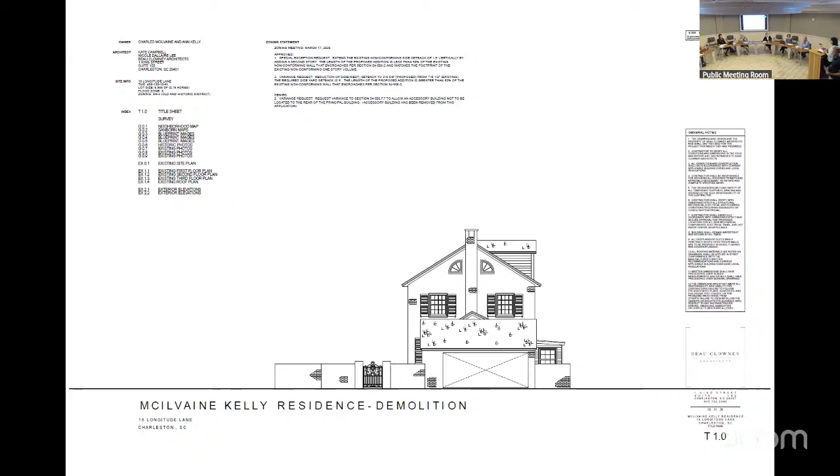So we are proposing the demolition of a garage, an unoriginal link to a 1950s neocolonial house. The garage and the link were kind of coupled together over time, and there's been a bunch of smaller renovations as well.

Across the street are largely the rear gardens and garages and accessory structures for houses on Tradd Street.

Can we zoom in? No, we're not. Okay, so again, those properties are facing away from Longitude Lane. Their architectural sides face Longitude Lane, and their architectural fronts face the side of the property.

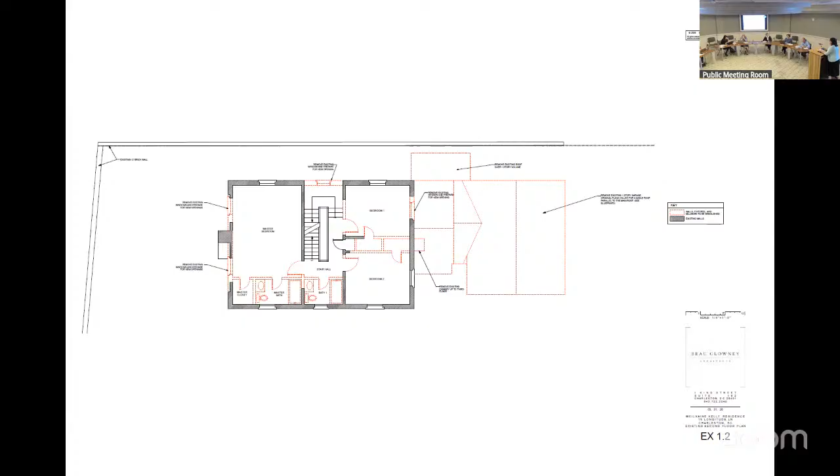This is the second floor, again, largely removing the garage and attached pieces. And then we are proposing a small removal of this upper window with the circular top that we believe has already been touched.

On the top, we are proposing removal of knee wall to make space for potential dormers in the front, and then potential dormers in the rear of the roof, again trying to add space to the attic potentially while staying within the footprint.

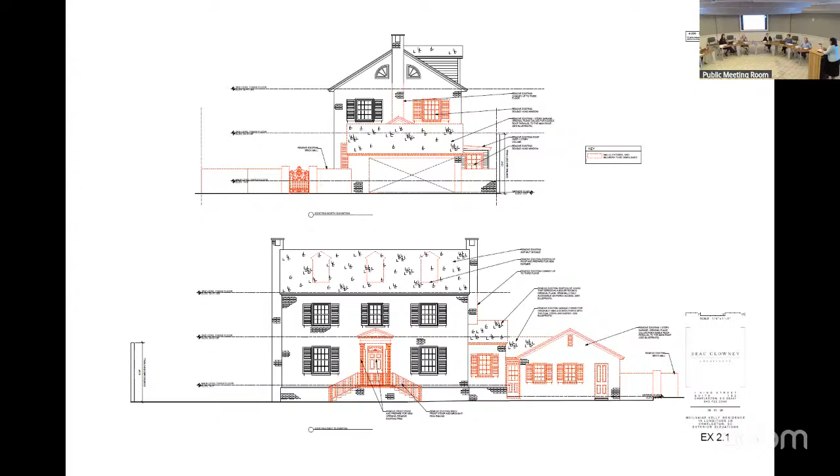And we are also proposing to replace the front door and front stoop, and so we're asking for those to be removed.

And that's it. Any questions for the applicant?

I have one. So do you want to demo the fence and the gate too? Did I see that? I didn't see it in the plan, but I saw it in elevation.

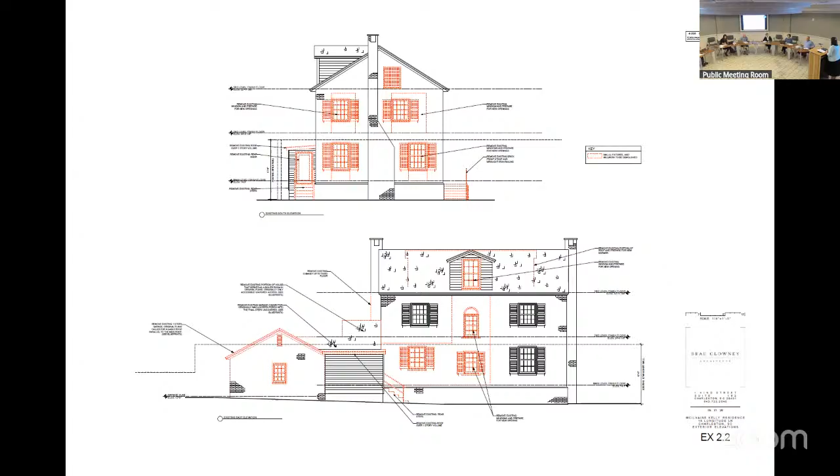Yeah, and the clients have retained the services of a landscape architect. This is just kind of our first shot at removing these gates.

And any idea how old the fence and gate are? Our assumption would be kind of similar to the house, so 50s probably. Okay, thank you.

But again, it's not shown on the original plan from 1949. Right.

Thank you. Any other questions? Thank you. Do we have anyone speaking from the public?

Laurel Fay with the Preservation Society of Charleston.

The PSC appreciates the applicant reaching out to us and for the opportunity to visit the site this morning. We acknowledge that this property is set within an unusual context with a non-traditional site plan and orientation, which makes finding close precedent examples challenging. Nevertheless, 15 Longitude Lane is a good example of mid-century colonial revival style architecture that speaks to the developmental history of the streetscape. The priority for this project should be to retain the historic form and character-defining features.

As proposed, the scope of this demolition request is significant, and the PSC is concerned that the cumulative impact of this demolition would fundamentally alter the form and character of this historic property. The 1949 architectural blueprints, which the PSC was excited to see included, clearly show the colonial revival door surround and double stair as original features, and these should be retained.

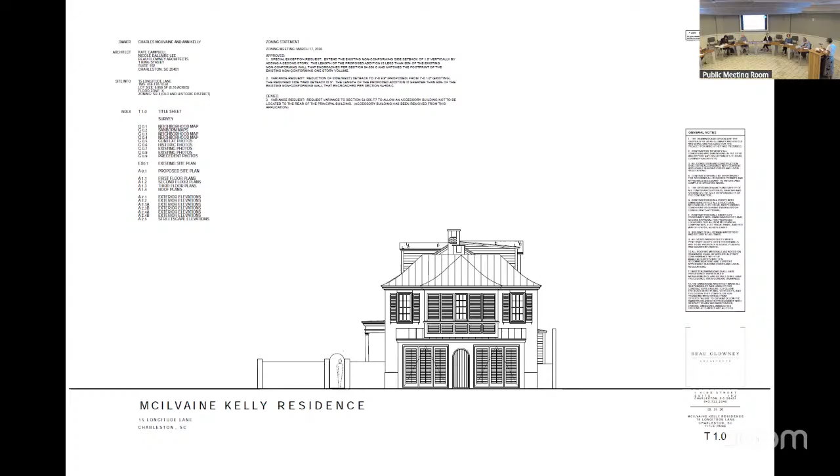So, Kate Campbell, Beau Clowney Architects. Start with, Nicole kind of gave a background of the project. We did go to BZA in March of this year, and were approved for encroachments on the west side. Apologies, the sheet that says east side should say west side in the packet, so sorry about that confusion. Along with special exception requests to extend vertically on top of the existing encroaching wood framed portion that you saw in that photograph on the west side.

The clients approached us with the goal of retaining the house. They agree that the core of the house is really the pure piece of this project,

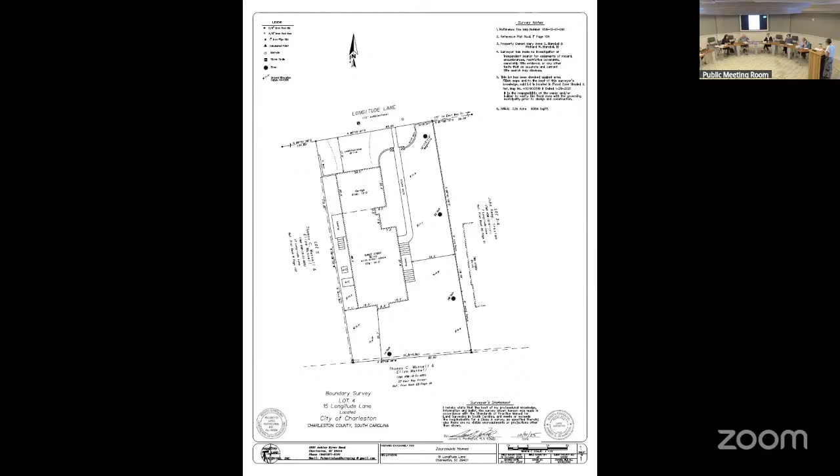and also keeping a garage. And so they do want to add to the house. This is a unique lot. It faces east, and so we're proposing a garage addition and hyphen to the north and west sides of the existing house, as well as a two-story piazza to the south on the garden side of the house. Again, the goal with this project is to keep all the service functions of the house on the same side of the house as they currently are.

It was discussed that a lot of the properties along Longitude Lane, it is a lane, very small, as we all saw today. But most of the accessory structures that are garages are detached and kind of adjacent to the rear yard of the houses that front Tradd Street.

One, two, three, four, five, six kind of garage functions. So we wanted to keep that same service function while adding square footage to the house. With BZA, we are currently under our lot coverage, so we did not want to ask for a zoning variance for additional lot coverage, and so what you're seeing here is 35%.

And so we are adding vertically because we don't have the ability to add horizontally to the house. We also have some large trees on the east side, and so that precludes any additions. Plus, that's the architectural front. And then the south side is more of a garden structure.

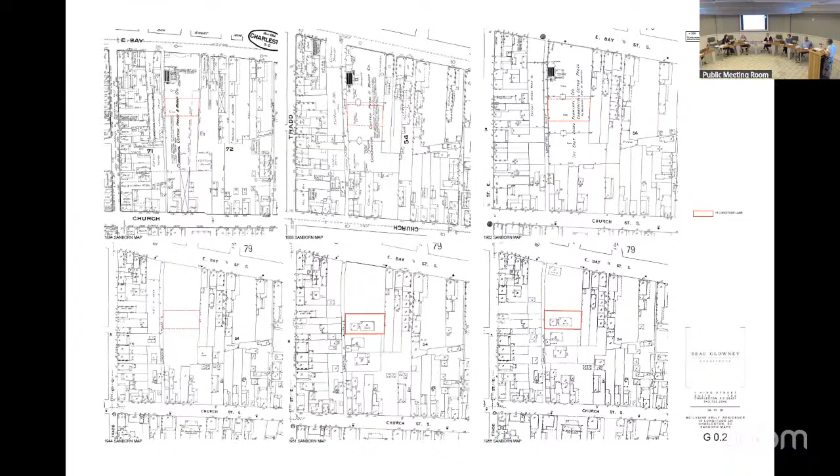So the challenge with this project, the owner again wanted to retain garage and off-street parking. And so we are... The ability to parallel park along Longitude will be retained, and then we're allowing for two cars to be able to park in the garage.

And so that is the one-story piece that comes further toward the lane than the existing garage, all one-story, and really accomplishes the ability to park a full car while allowing a parallel parking space for navigation with that tight lane.

One of the other elements that our client wanted to incorporate was an elevator. This house currently does not have one, and they do want to keep in mind aging in place. And so the elevator, as I get into the plans I'll show you where that is, but it basically occurs at the hyphen between the garage and the existing house.

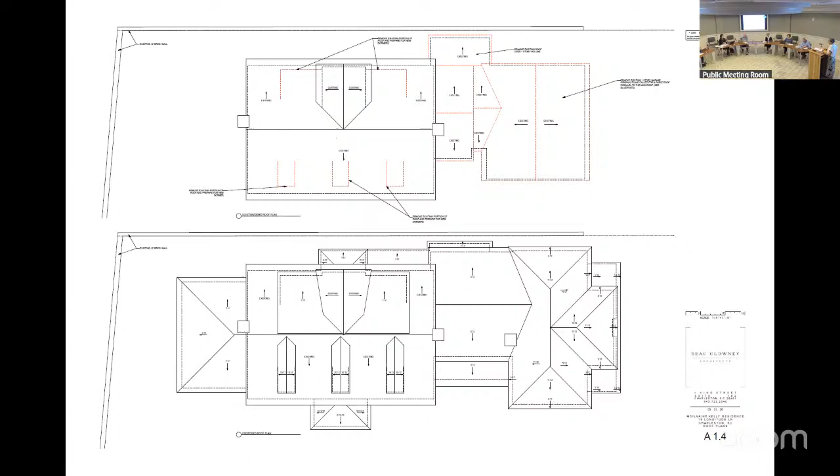So this is a challenging project because the architectural facade is east facing and not fronting the lane. We're balancing honoring that architectural garden elevation with the main body of the house, the hyphen, and a subordinate building with the fact that the front of the house is along the lane. And we have a garage function, so we're trying to balance a lot in terms of this feeling like an outbuilding like the other properties have along the lane.

There are other two-story outbuildings that have garages, so that was kind of what we were looking for, but also being a hyphenated addition to the main house, incorporating that elevator in the hyphen. That's the south elevation, with the two-story piazza. Again, totally open to restudying that western roof, if the board would allow.

One thing to comment, which everybody saw today, that's a 12-foot wall on the south side, and it's also a 12-foot wall on the west side. So as viewed from Mr. Parker's property on the west, that's the elevation that would be visible from his property only.

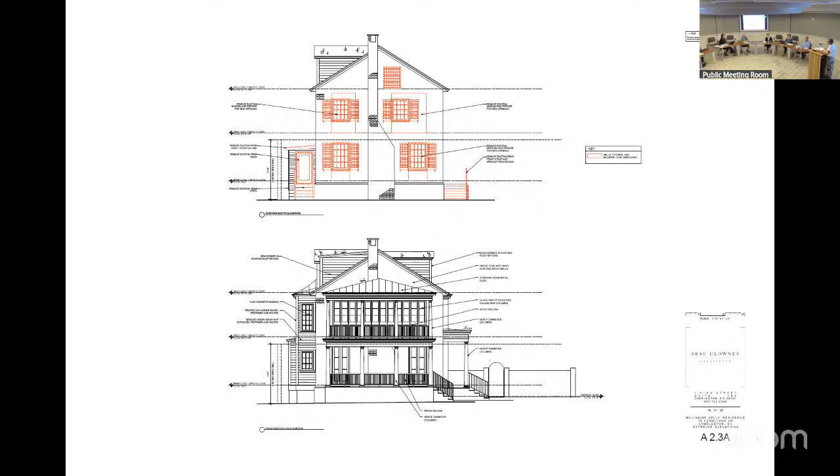We have - one option is also to lime wash the brick. We're in discussions with them on that, but there aren't any true headers going across - it's all masonry openings, running bond over most of the windows. The only area that has a header condition is that later added archtop window. So I don't know if you'd lose the header, like in another type of project you may be concerned about losing that definition of windows, but...

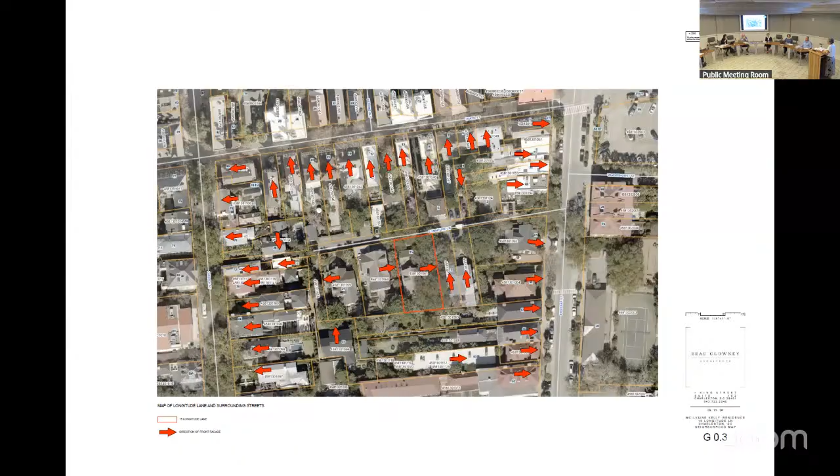When you return the stucco to the windows - oh yeah, on the trim - yeah, we lose much of that exposure. That's something we would have to study for sure, but they just like the idea of coating that with a hard coat, or we had talked about a lime wash which is more of a paint finish, but they liked delineating it from the stucco outbuilding, the garage building. Happy to explore that.

Any other questions? All right, thank you. So we have anyone speaking in public? Historic Charleston Foundation - HCF is generally supportive of the proposed architectural direction.

That said, HCF remains concerned about the overall scale and method of the additions, which together constitute a substantial expansion of the building. HCF encourages further study of the west elevation dormer to reduce its visual prominence, as well as consideration of reducing the overall footprint and massing of the additions, so they remain clearly subordinate to the historic building.

Laurel Fay with the Preservation Society of Charleston. While this is an attractive design, the proposed addition on the north elevation is very large and almost completely obscures this historic property from view along Longitude Lane. As designed, it reads as a newly constructed primary building, fundamentally altering this historic building's relationship to its context and setting.

The proposed additions, coupled with the new and enlarged dormers on the roof, would virtually double the square footage of this property and are not subordinate to the historic footprint. While we recognize that the traditional rules of subordination will be applied differently to this property, given its orientation and existing street-facing garage, the primary historic mass should still be read as such.

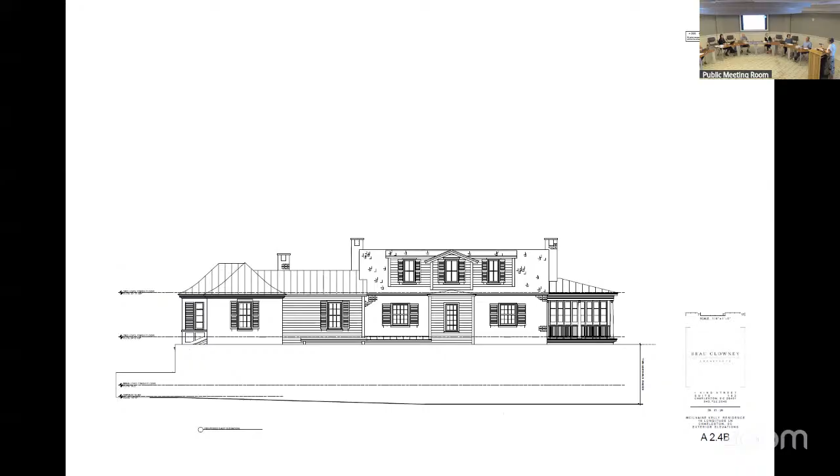In terms of the visibility of the front facade, it goes back to the challenging nature of this particular project. If this was a house that faced the street, we'd have a totally different conversation. It's a house that faces the garden. When I was there today, I saw that most vehicular traffic comes from east to west and views the facade of the house on the oblique.

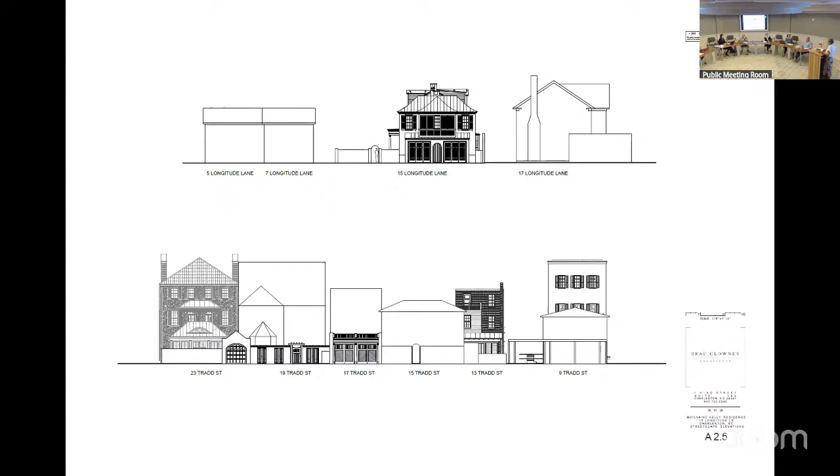So if you look at this streetscape, you'll never see this in true elevation. You'll always be experiencing the property viewing the main facade of the house at an angle, which will stay open because we've got large trees that can't come down. So I'd argue the natural place to add to this house would be the north side with a hyphen, as if this were the front elevation, just turned 90 degrees and facing east. Therefore this structure faces the lane, rather than the front of the house facing the lane.

As I said before, for the expansion of the building, we would love to go one story. However, we'd need some lot coverage variance, and due to the restrictions of the house's placement, it's very difficult to add horizontally and keep it a one-story addition. The expansion of the house isn't overly large—it's really the hyphen and the garage with two rooms above. So right now it's a two-bedroom house, and it would become a four-bedroom house, not an overly large house with not overly large bedrooms.

We can certainly study the eave heights, and that's something from the staff comments I tend to agree with. Lowering that eave line and even changing the pitch of the garage building will go a long way to further subordinate it, and may hopefully resolve some of the comments from the preservation groups as well. It is a balance—we're adding an elevator, which has certain height clearances we're trying to accommodate, but we can certainly study that in the next round.

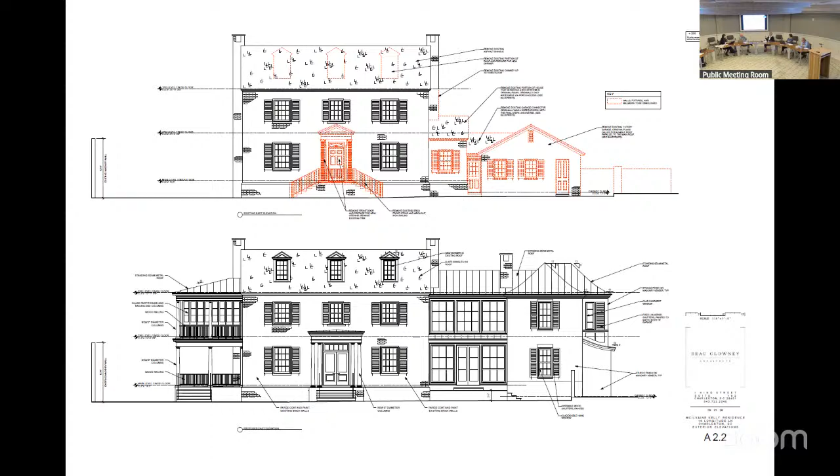So I think just—are you saying so that, like in plan, that part of the garage, east elevation? Yeah, the roof plan would help. Actually, this floor plan would be great, honestly.

I think you're thinking on the first floor—well, I'm sorry, Travis, could you go back one more? Yeah, so I think I would have expected to see this corner, and this side of the hyphen is what we might have expected to see on both sides, something on the other side. And then this would have, typically, we ask that it's back from this corner.

I agree. I could see maybe you have a little more latitude on this side to not pinch all the way in, but some respect for this piece—the hyphen, and then the addition—is typically what I feel like is our typical kind of diagram that we ask for. The addition, you might see the original building frame back behind it. Now, I do understand there's more of a three-quarter view looking toward the entry this way, but you would think this would be stepped back to allow more emphasis on that. Maybe we have more flexibility.

That was just thoughts based on our concepts that we typically look for. Yeah, I agree with both of you. I think this end of the project is very successful, and I just think the corners of the original building form need to be respected. I think the addition on the street side could be as wide as the main house, just because this is sort of a unique situation. Maybe the garage is pretty generous in width—maybe that could be scaled, tightened up some—but yeah, I agree with both of them. Also your drawings are very well organized and easy to understand.

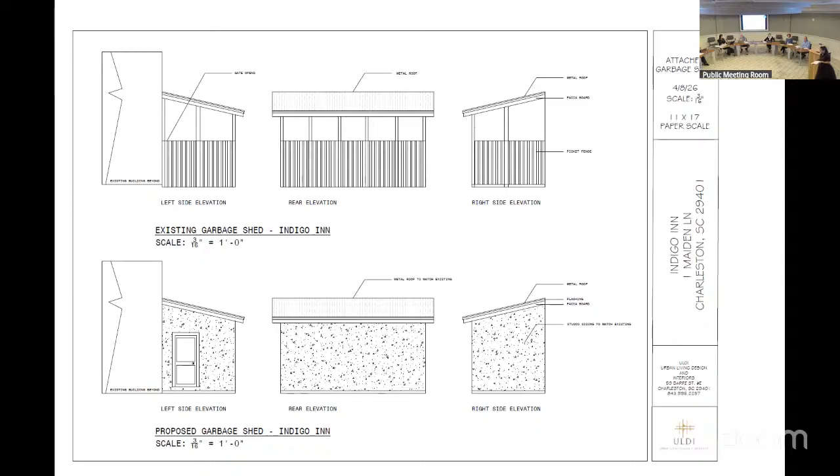Okay, Frank, could you give us the staff comments and recommendations please? Staff just had observations that it is an after-the-fact request, and we think that the structure is highly visible and not appropriately designed for the existing structure. So we were recommending denial.

Thank you. Did you want to respond to or clarify anything raised in the public comment or the staff comments? I'm Mike Hogan. I'm the trustee for the Limehouse Trust that owns the hotel here. We were just trying to make an improvement to have some storage. I can understand that we need to change the facade. So what I think we probably need to do is come back and do a redesign, resubmit, and see if we can have an approval for that.

Does that make sense? Yes, sir. Yeah, because today's the first day I kind of looked at it, and I think we just got a little ahead of ourselves. So I think we'll come back with something that looks a lot better. Thank you, Mr. Hogan. All right, public comment and the applicant's presentation is now closed.

Move into board discussion and vote. I think Mr. Hogan made our point. It's not just the design of it, but also some of the materials.

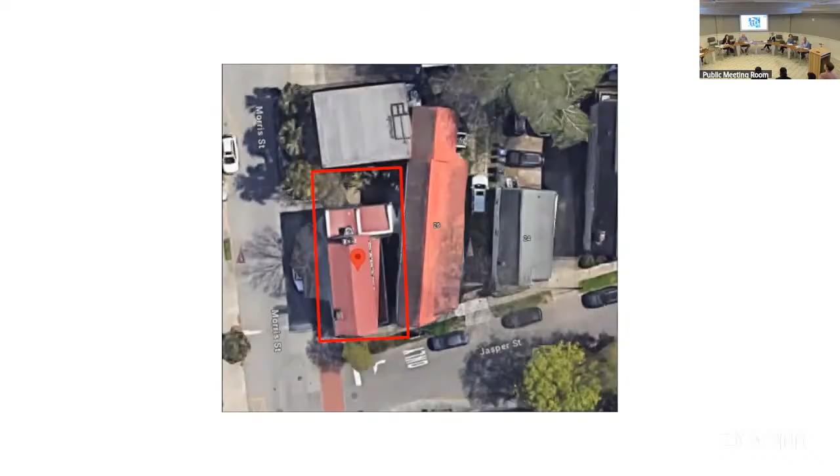Hey there, I'm Jordan Cox, owner of the property. Sorry, this is my first one, so I didn't realize we were supposed to bring a presentation, but we did bring a sample of the window we'd like to replace the existing windows with. They're suffering from wood rot.

We are preserving the front of the house with original windows and the whole lower level porch, all original windows. We're only replacing one window on the lower level, which is mostly obscured by the vehicle in the driveway. So from the public right of way, there's very limited view of the windows that would actually be replaced. The replacement is an Heirloom window, it's all wood, specifically designed and built to have a historic profile, so it matches the window.

I'm trying to do the right thing by preserving the front and everything that's clearly visible, and just replacing the ones that need to be replaced. There's really bad wood rot right now. I've got duct tape on multiple windows, keeping the rats and the roaches out. Hopefully you guys can take a look at this and see if you would approve it.

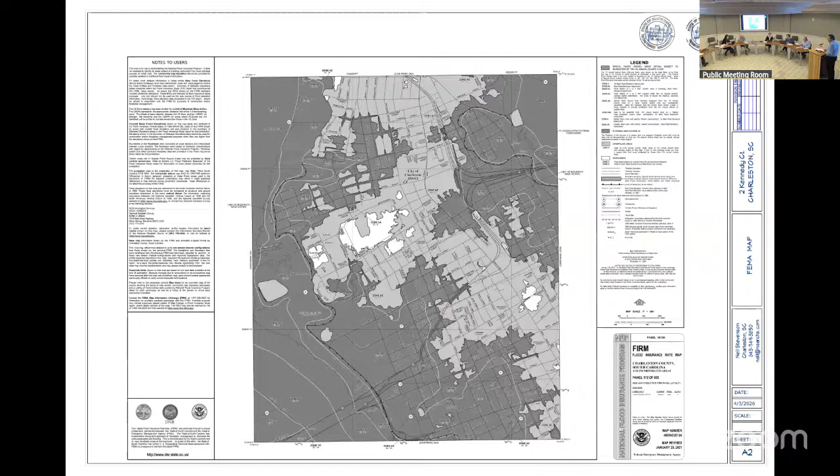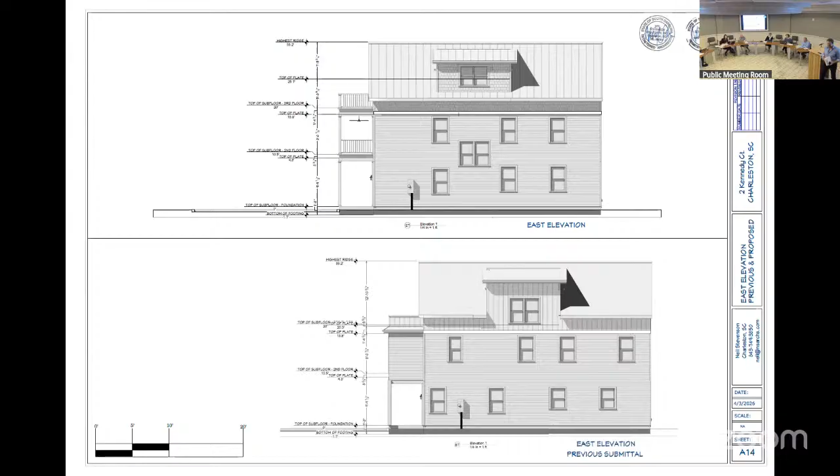But those were the things we were asked to study. Any questions for the applicant? All right, do we have anyone speaking? Okay, if you could give us the staff comments and recommendations, please.

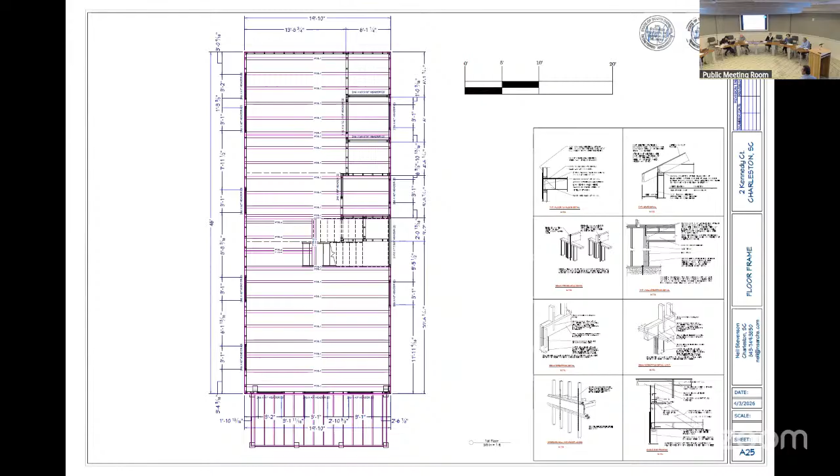Staff just had the observation that we felt the previous board motion was interpreted well. So we are recommending preliminary approval with a final review by staff of the permit documents. Frankie, Neil, do you want to respond or clarify? No, thank you. Public comment - the applicant's presentation is now closed, so we move into board discussion and a vote.

I think the changes to the third floor railing, that's a nice improvement. I think the eave extensions help ground the dormers much better.

I do think the columns could be upscaled, maybe to an 8 by 8 instead of a 6 by 6, because they look beefier on the render. The elevations, I think they're maybe a little underscaled, maybe bump those up a little bit.

The stair landing window, to me, it would be better if it were a single window instead of the gang window. I just think it would look more balanced on that side. And then this is a minor thing.

With the columns, I think they need to come in a little bit from the corners. I usually say align the outer side of the shaft with the trim above. I think they're kind of teetering out at the edges a little bit, but other than that, I think it's good to go.

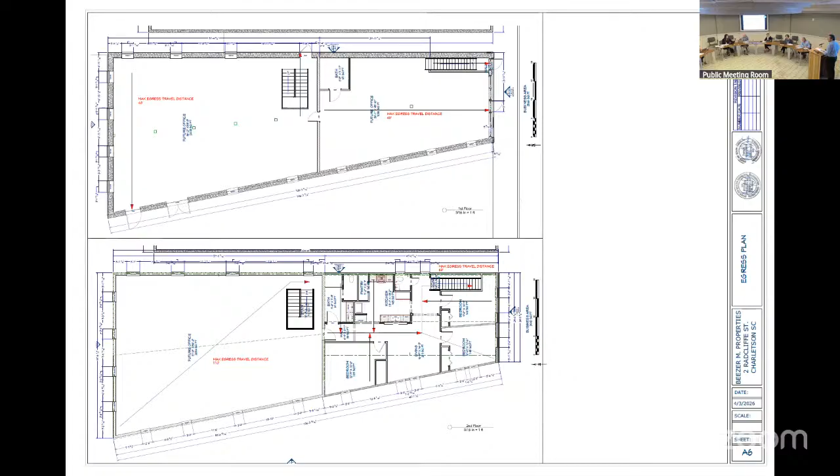But I've got a few samples, if you don't mind me passing this around. This is a horrible copy because my ink was going on my printer, but we would go with historical colors — actually we pulled the colors from Historic Charleston Foundation. I think that helps even the building out, because the brick is a little bit chewed up. I don't know if you also saw that this morning.

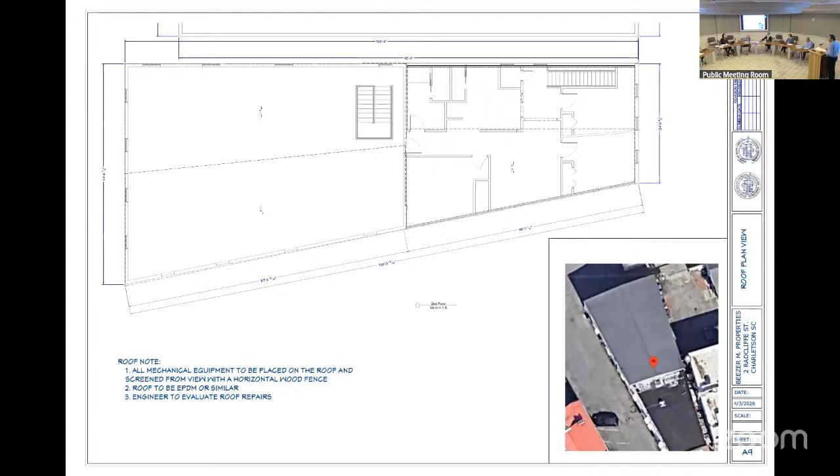But for the most part, we're just renovating the building in time. The rest of it — we're going to come back on this back part, and we'd like to propose a mural there with a local artist; you'll see a clearer proposal for that again. But for the most part, we really just want to make this building more presentable for current use, other than a funeral home.

We're proposing to just attach a structure that could be unattached later on, if anyone ever needed to do that. Any questions for the applicant?

So Neil, is this one of those instances where somebody just put a brick veneer over an old structure? No, it's brick, yeah. It's funny because the sides are wood frame, so there's been some weird stuff that's gone on in this building — it's actually got a steel beam that runs right down the center and lands over the front door. Structurally, it's a strange setup. There's been some things that have gone on in this building, but again, I don't think there were too many more owners or tenants besides the funeral home.

Any other questions for the applicant? And I know we're not to the point of sections and all, but I assume you're going to recess the storefront into the masonry. Yes, it will be recessed. Yeah.

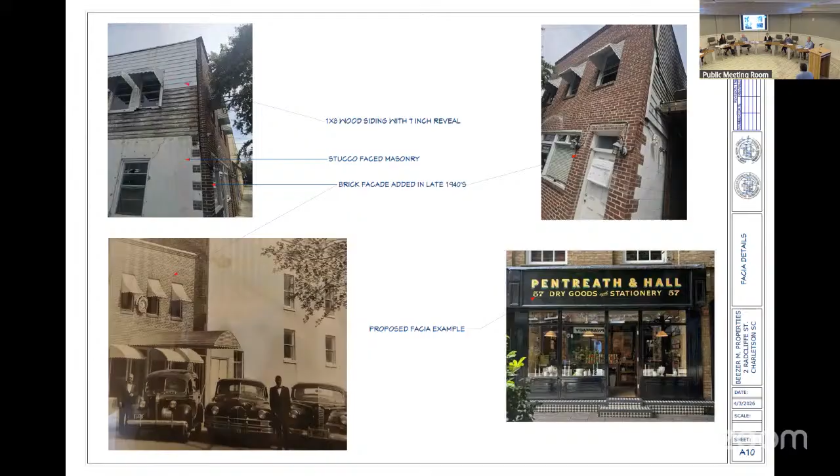Staff has observations - we feel that the band is very tall. Our condition for approval would be to reduce the height of that band so it does not engage far up to the second floor windows. Staff suggests eliminating the metal columns on either side of it. Our recommendation is conceptual approval with board and staff conditions, and preliminary final with staff.

Thank you, Frankie. Neil, did you want to respond to or clarify anything in the staff comments and recommendations? Just that we would be open to exploring any of that.

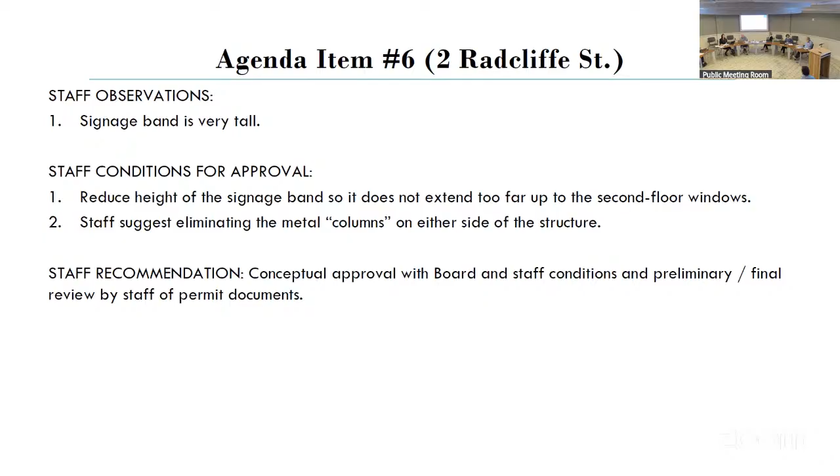Thank you. I think it's supposed to say conceptual approval, not final. Did I? It needed to be conceptual. Yeah, I addressed that in the staff comment. Okay, appreciate it.

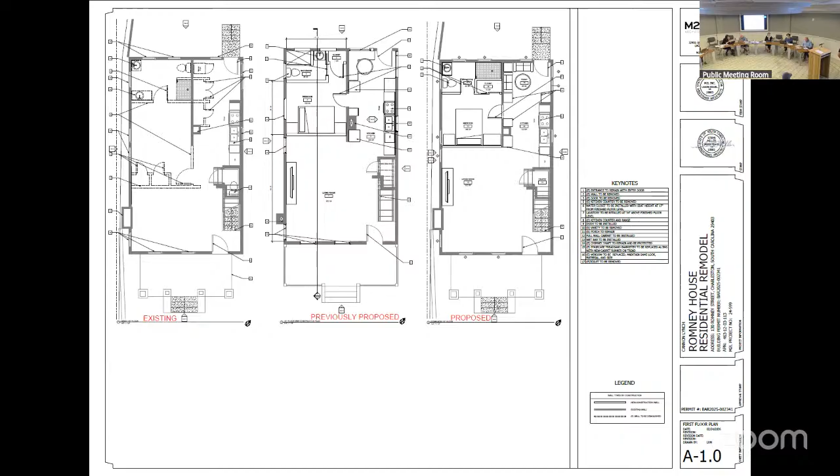This is the first floor: existing, what was previously proposed, and what is now being proposed. This is the front of the home facing Romney Street: existing, previous, and proposed. Nothing's changing on the front.

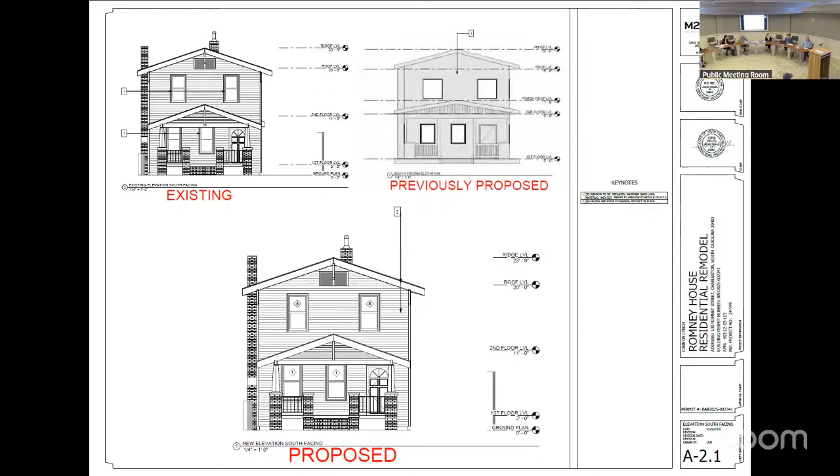I am requesting to replace all the windows, so these are what these notes will show on my window schedule. I'm now showing better fenestration details on the exterior. Not much was shown previously. The chimneys are now shown. The addition here is now shown as subordinate to the existing structure, with the roof line lower than the existing roof.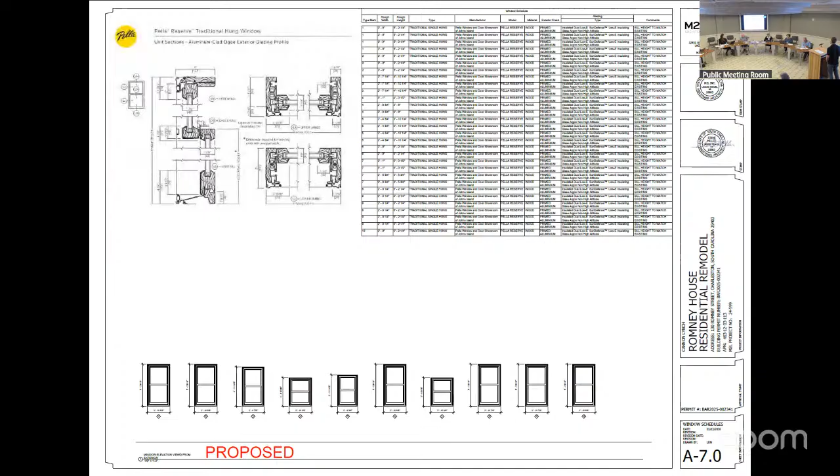One other question: your second floor addition, what are your ceiling heights in there? I believe they are 9 feet.

I'm guessing your question is probably, why can't this side be lower too? Yeah, I just think it would look cleaner if you could match the pitch of the existing roof. Yeah, the ceiling height would be lower than the rest. It'd be clipped in the corners, is what you're saying. Yeah, the ceiling would need to be, which may be hard to build, hard to flash. I could change it, that would be better, if you get wet.

Any other questions? All right, thank you. Do we have anyone speaking?

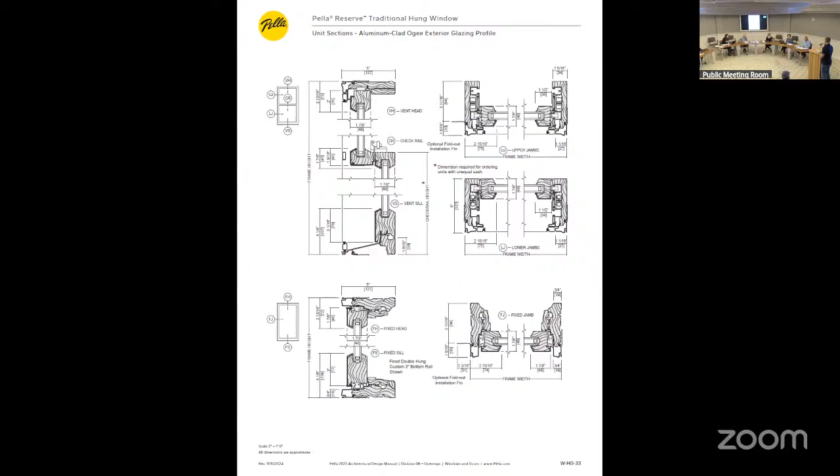Often when we go up to second floor, we go a little bit smaller. So just a thought to study that, or maybe you don't need a window in each space because they're kind of squished together there. Yeah, there's 3 on the back. Yeah, I think the original, the first submittal, can I go back to it?

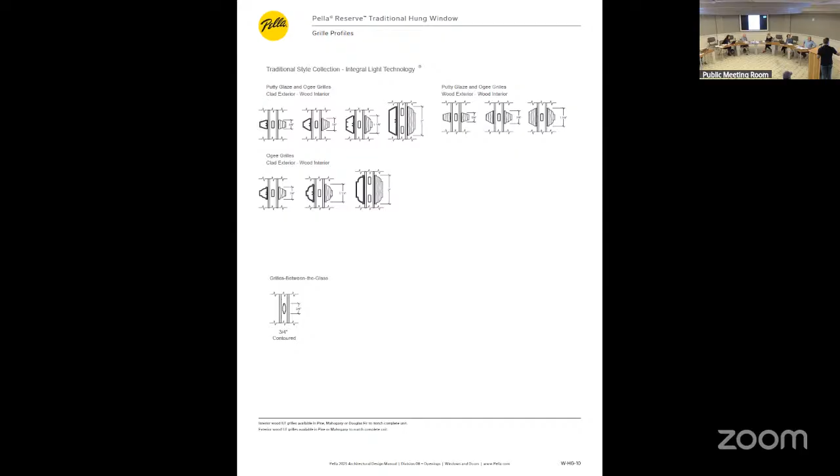Yeah, so we had previously done something like that, but we can study that. If you could start to align some tops and bottoms, just kind of clean things up so it's not as scattered looking.

But are you guys saying I can replace the first floor windows? I think according to policy, staff should work on that for replacement windows. They can be SDLs. I think getting some unity in the windows matters, since there are different types of light cuts.

Just to clarify, by approving this, are we approving full replacement of the windows, or should we deny that particular piece so we can work with staff on whatever is allowed? We can't approve full replacement - that's the only clarification, that'd be the only piece. There's still, I thought we were looking at conceptual for the addition.

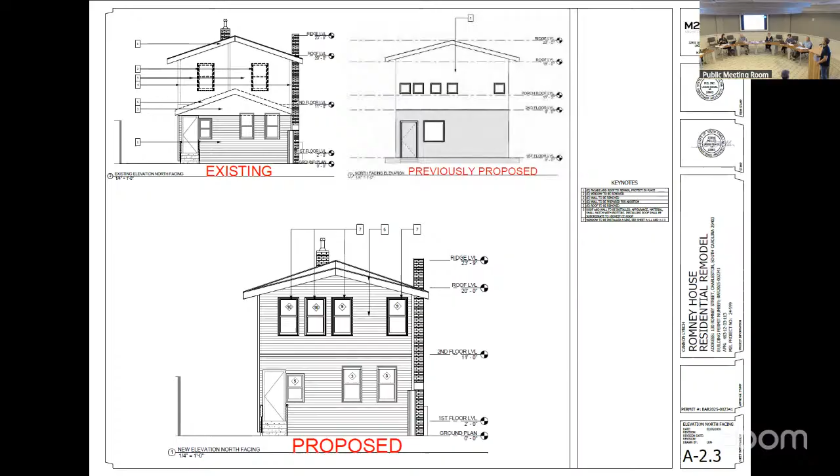All right, agenda item 8 is 42 Society Street. Frank, if you'll give us an introductory overview of the project, please. 42 Society Street is in Ansonborough, Council District 8. It is a category 2, circa 1854 property in the Old and Historic District, requesting conceptual approval for gas lanterns, garden shed, and shutters. This is the property's location on Society, and I will turn it over to the applicant.

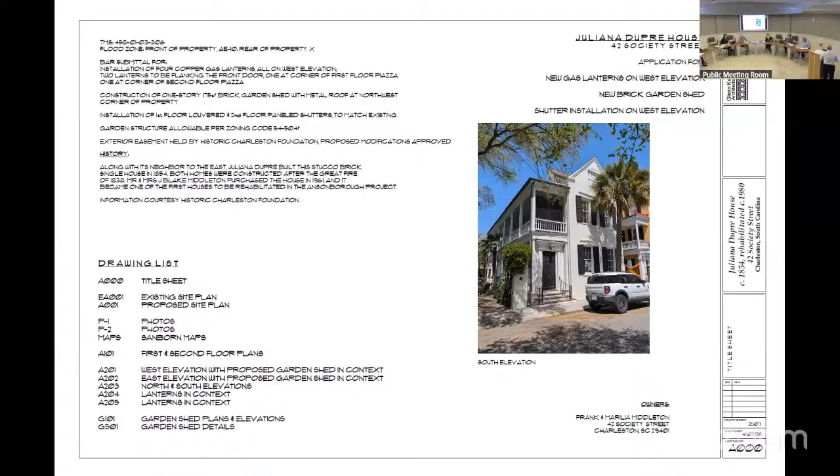Hello, Ruben Sowar with Glenn Keys Architects. This is the Juliana Dupre House, 42 Society Street, built in 1854. The application is for 3 things: new gas lanterns on the piazza, first and second floors, and around the corner on the back porch; installation of shutters on the first and second floor of the piazza, as you can see in the photograph with the existing ones on the south elevation street elevation; and the third part is a garden shed in the rear of the property for storage use. I'll take you through the garden shed first, then we'll wrap up with the other two components.

In 1960, Loutrel Briggs designed the garden for this project. This was one of the earliest of the Historic Charleston Foundation's renovation and restoration projects in that neighborhood. He designed several gardens along the street, and this is one of them. In 2008, I believe, the elongated octagonal room was added, and then the garden was updated.

When we approach putting a garden shed in the back of the building, the idea is always to build in the area on the east side of the property, following the main part of the house, and keep the west side open. But this is a very, very strong garden design. The house at 44 is actually located toward the rear of the property, so all of this is open front yard facing Society Street.

As we got into the garden and tried to appreciate and maintain everything, we came to the conclusion that this was actually the better spot to locate the building. It puts it in public right-of-way view, and you can see where we've located it.

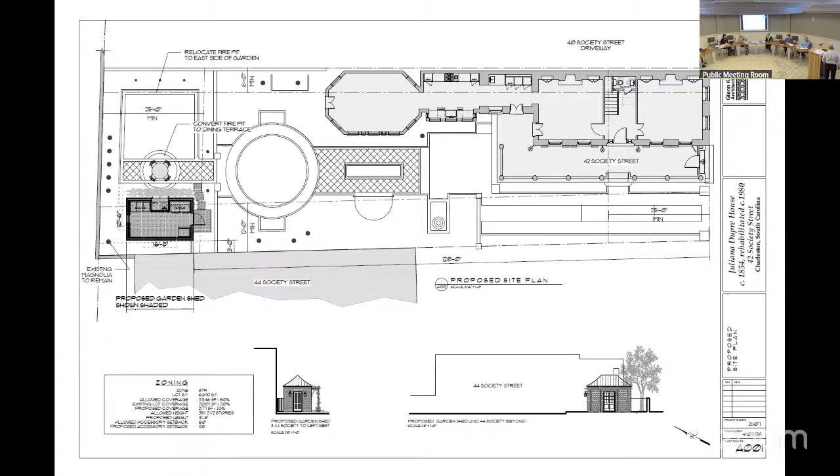I'll take you to a couple of photographs. This is from the piazza, looking straight through the garden. There's a very strong axis that runs north to south. As you go back into the garden, there's a circular grassy area, and then you transition into the third part of the garden at the rear.

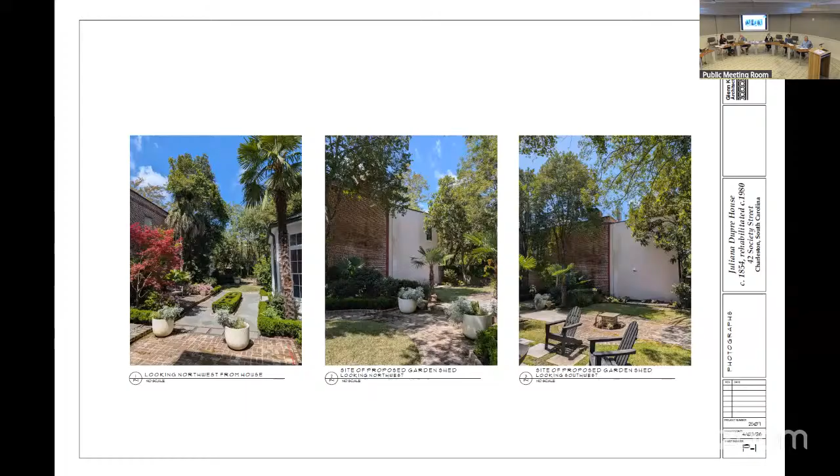This is the property wall at 44 Society Street, and another photograph of it. This is looking back towards the house, and you can see the octagonal room.

When we first started out, the idea was to just add on to this, but it's really not a form or part of the house you can add onto without ruining that whole space. You can see from the piazza that very strong axis goes straight through, and this is photographed from the rear, or the north side, looking back towards Society Street.

Looking at Sanborn maps, you can see that as of 1955 there was still a masonry kitchen building there. We do not know - I wasn't able to find any history of when that got demolished or the circumstances around it.

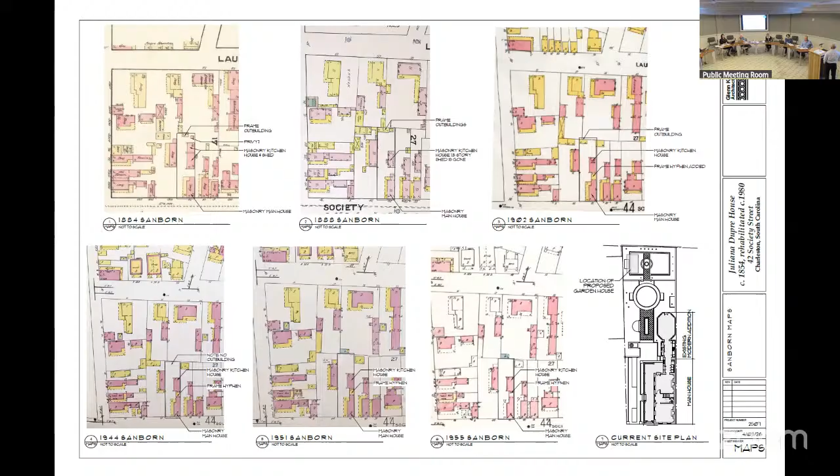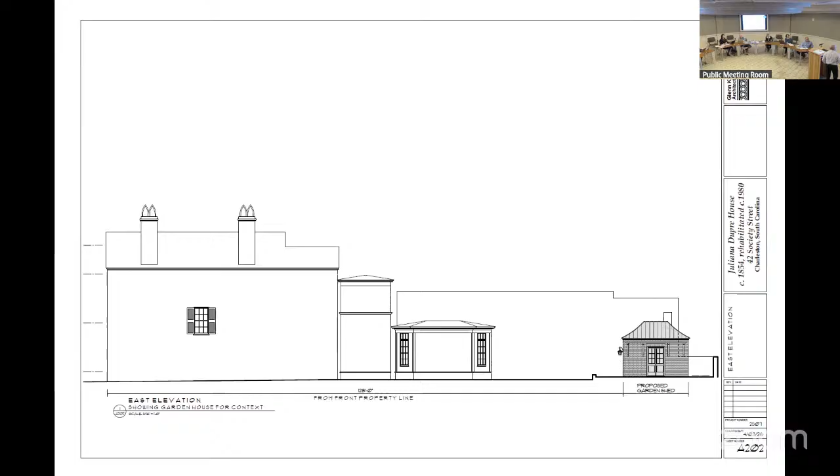In elevation from the street, this is the location where the garden shed would be. And this is from the north side looking back towards the street.

These are the up-close elevations of the shed itself, again showing the line of the house at 44. The idea is to anchor that west side of the garden with something that brings the scale down from the massive wall we have - a garden folly.

So we tried to play with more curves, more organic forms, and introduce a trellis on the garden side so some greenery can grow up, so it'll be a proper west side to the whole garden.

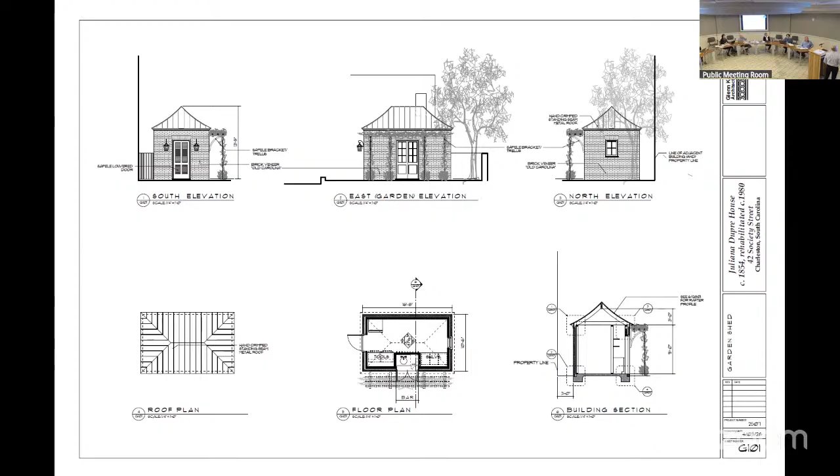And also, as you come around to the back side of the piazza, we introduce lanterns on the garden, on the corner where they have a dining space.

In plan, there are two lanterns flanking the doorway on the first floor only, and then a second gas lantern on the first floor piazza at the corner, and one on the second floor as well. And then you can see these windows where we're proposing the introduction of shutters.

And that's the application. Any questions for the applicant?

So are you in a flood zone? Are you in a flood zone? I'm sorry - are you in a flood zone? No. Well, good for you.

Any other questions? Anyone speaking?

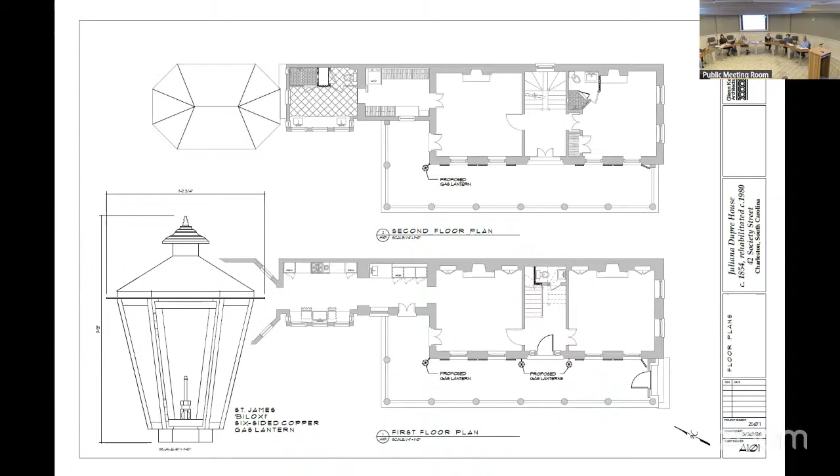Staff just have some observations. We did a category 2, so staff can only approve repairs to match. From what we saw, there were not shutters historically on the building - they were added on the front, but not until the 1950s. Just for information, and the accessory structure is subordinate and differentiated.

Staff recommendation is a conceptual approval with preliminary and final by staff.

Thank you, Frankie. Did you want to respond to or clarify anything raised in the public comment or the staff comments? Public comment and the applicant's presentation is now closed. We'll move into board discussion and a vote.

Nicely done, yeah I do too. And it needs to go back for staff review. It's got wall sections and all the details are there.

Are we allowed to say preliminary? Because I think y'all have to do final approval, permits, yes. We can make a motion for preliminary.

The only minor comment I had was that one gas lantern on the corner. Seems kind of unusual or awkward, a funny placement. I don't know if I've ever seen it that way. It's unusual, but I don't know that it necessarily looks bad. I'm not going to lose sleep over it. It just seemed unusual.

Do we have a motion for preliminary? I make a motion to approve conceptual and preliminary as submitted, with final review by staff. All right, we have a motion on the floor for conceptual and preliminary approval, with final review by staff. Do I have a second to Daryl's motion?

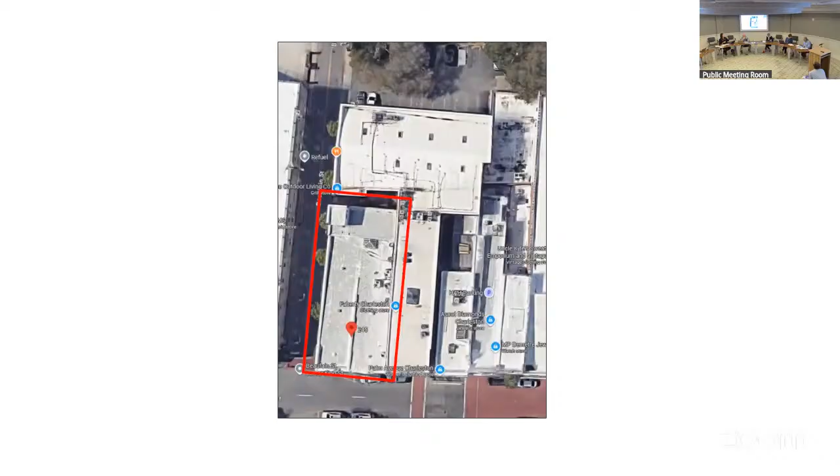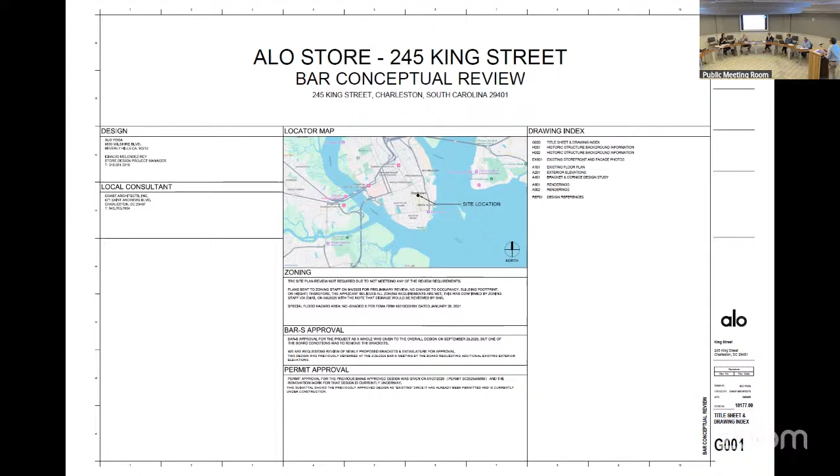Hey everyone, I'm Luke with Coast Architects, and you may remember this one from a couple months ago. Y'all had requested some additional information, and I think last September we got approval for an overall renovation, removing the storefront and replacing it and all that good stuff. I think they just wrapped up construction, so all we are requesting now is to renovate the entablature because the client really wants to add brackets.

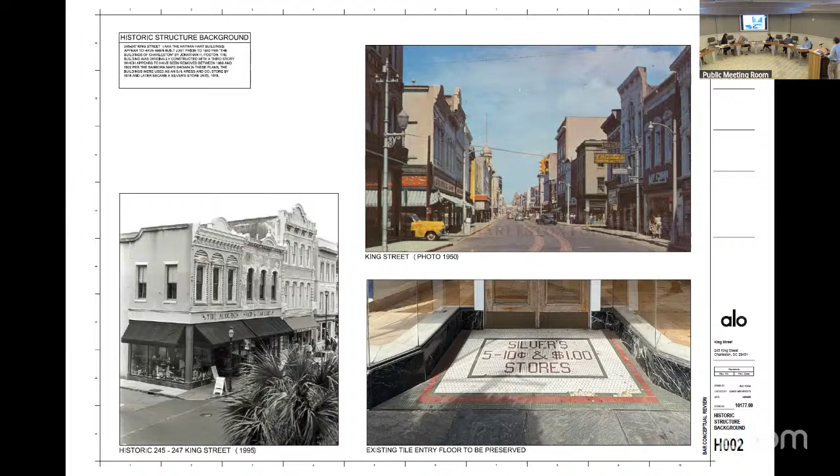Just a little historic background on the building. Like Frankie said, it was built in the 1840s. It was basically two separate buildings, and sometime in the early 1900s the ground floor was converted into a single storefront. You can see some existing photos here. The Mutual Carpet Company one in the top middle was from when it was two distinct buildings at the ground floor, and then it turned into a five and dime in the early 1900s, which I think is when it was converted into a single storefront on the ground floor between the two buildings.

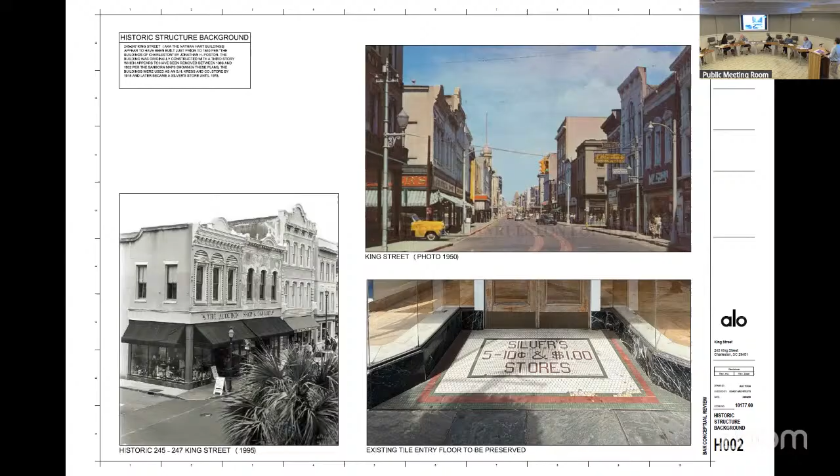And the Audubon shop to the bottom left is kind of the state it was in when we got to it. These are some existing photos from before the renovation that has already occurred. It was a Rack Room Shoes, and the existing entablature was basically just plywood. I imagine the original entablature had fallen into disrepair some time ago and been kind of taken off and covered up.

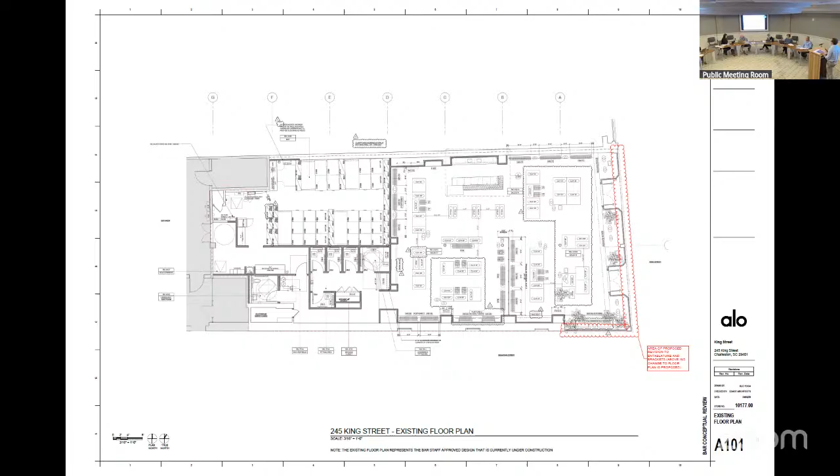So this is a floor plan because of the requirement, but nothing is changing on the interior. Like I said, it's just the entablature above the storefront, but it does wrap the corner.

Going from the top down, the top is what was originally presented to the board back in September of last year. We had received conceptual approval with final by staff, with the condition to remove the proposed brackets because it felt too applied. The original entablature, there wasn't any proposal to do anything to it, so in all reality the brackets were essentially applied.

In the middle is the elevation that was ultimately approved and given a permit, and the construction completed. The original entablature was just essentially left alone. Well, it was removed and then replaced the way that it was, because of construction requirements to get the storefront in. And then the bottom image shows the two elevations that we're proposing.

On the left is the side street, and on the right is King Street. The brackets that we're proposing are consoles. They're basically a little bit less than the width of the pilasters or columns, and they're at each one. We are proposing to do some entablature design in order to complement the brackets and make it a bit more classically proportionate.

Like I said, it was originally two separate buildings, so they have distinct entablatures and designs at the second floor level. What we wanted to do was try to bring those two designs together, bringing the antefix of the consoles from the left building and the finial from the right building, melding them into this bracket design on the top right that you see.

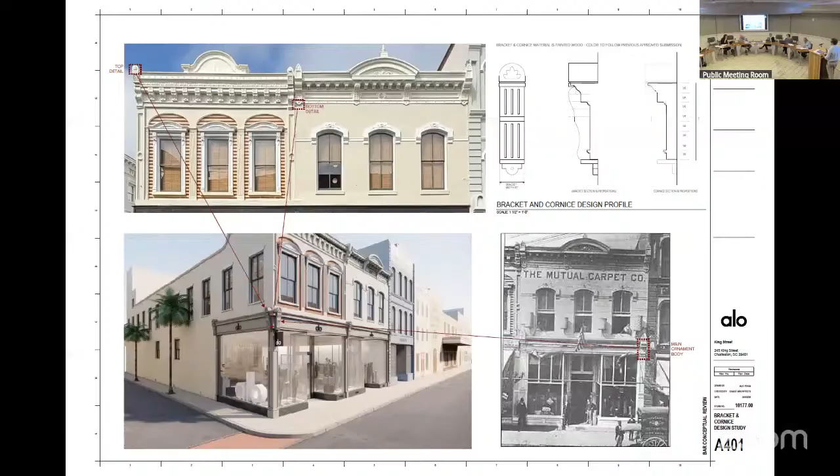But whenever it was combined into one storefront on the ground floor, that kind of got lost. So we're trying our best to unify it and give King Street a bit more of an entablature than what's currently there, which is just a plywood box. So these are some renderings showing that. You can see that the entablature projects out at the cornice to kind of incorporate those brackets, and the frieze making room for the already permitted Alo sign.

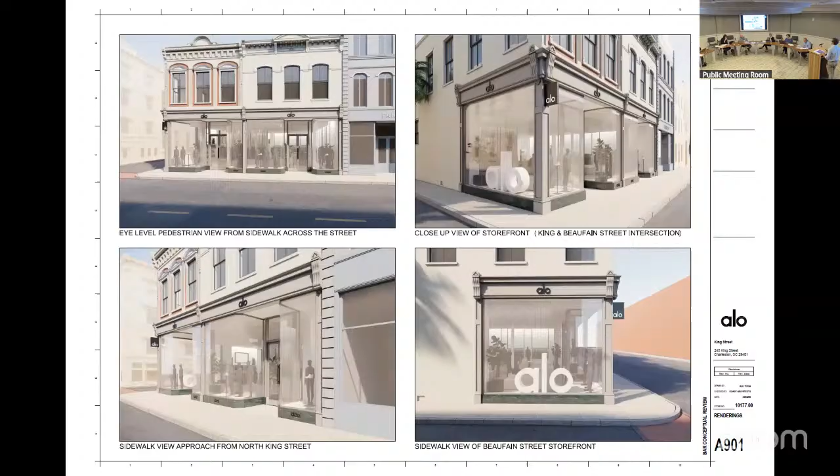And some more. So this is what we're proposing in terms of the renderings, and then we provided some renderings side by side with what was previously proposed last September, where the brackets were requested by y'all to be removed.

So that's it, I'll leave it on that. Any questions? All right, thank you. Do we have anyone speaking?

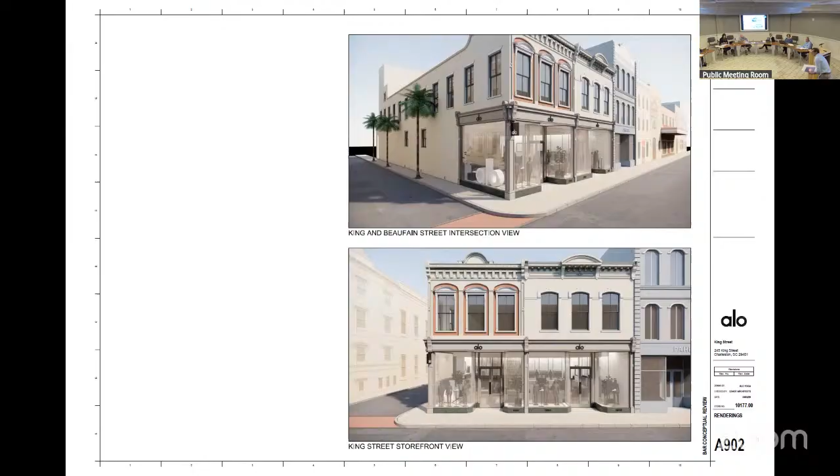Frankie, if you'll give us staff comments and recommendations, please. Just to note, this was previously denied as a condition from the motion on September 25th last year. It received conceptual approval with board and staff conditions, and final approval by staff, with one board condition being that the brackets would be eliminated.

Okay, did you want to respond to or clarify anything raised in the staff comments? All right, public comment and the applicant's presentation is now closed. We'll move into board discussion and vote.

I think our problem at the last meeting, a month or two ago, was just that there wasn't the submittal requirements we needed to see. You wanted to see what was previous, because I hadn't been at the September meeting and we didn't remember, and somebody else hadn't either. I think being able to see the side by side was the big part that was important. So I don't think we had a problem with the design at the last meeting, it was just that we really wanted to see what had changed, which I think they've shown here. It was kind of incomplete, minimal drawings.

Yes. And the fact that you guys don't have an issue with it, I don't have an issue with it. I appreciate there's a lot of thought that went into this, a lot of detail, and it's nice to see something well thought out and well designed in a way that unifies the two buildings, that speaks to both. So Laura, did you want to make a motion?

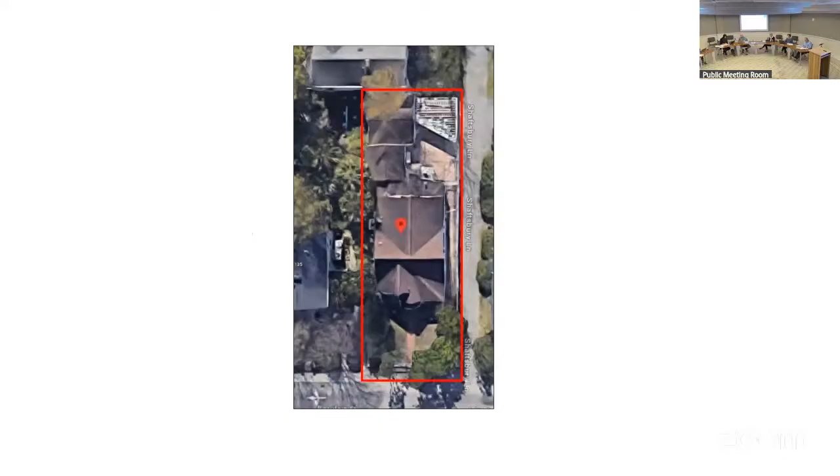Frankie, if you'll give us an introduction of the project, please. 137 Beaufain Street is in Harleston Village, Council District 8. It is not surveyed, circa 1930, in the old historic district. Requesting conceptual approval for a new screen, chimney, and fenestration changes. This is the property's location on Beaufain. And I'll turn it over to the applicant.

Patrick McGrath again, architect with Cozy Studio. First thing I want to point out is this is copied from the BAR portal, which shows the history of how many times this project has been through the submission process. We have done our best in this presentation to clean that up with our records of what we have, to simplify it into the previous approvals and organize that on top of that.

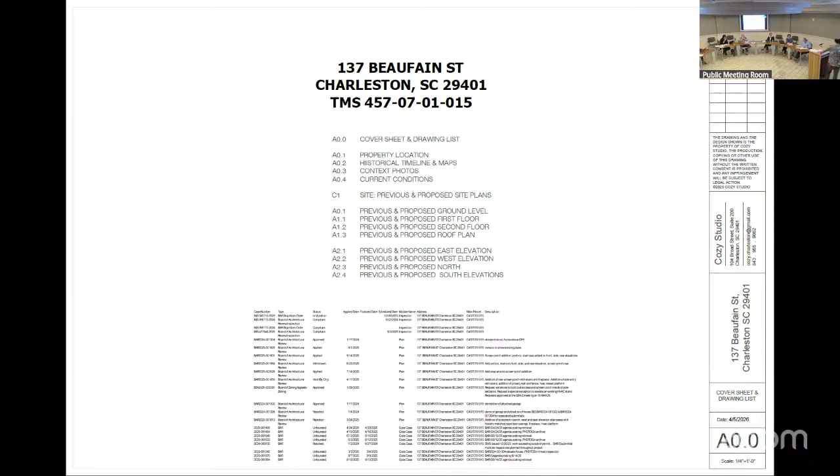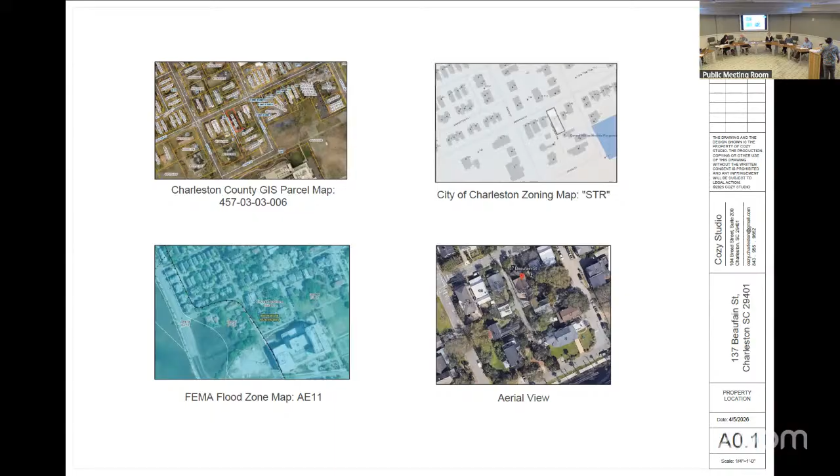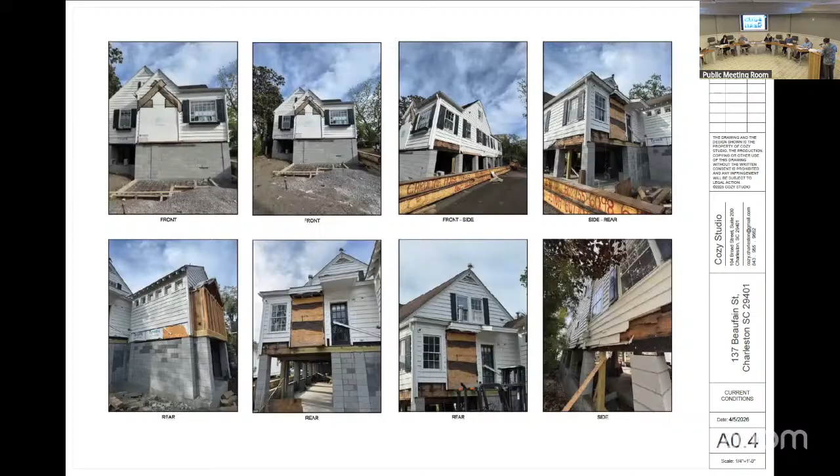These are some images of the construction in progress of the previously approved lift and renovations. Again, would like to point out here that on the addition here, we are showing the rafter tails, and the windows here will also show up on our proposal on the addition at the back of the home.

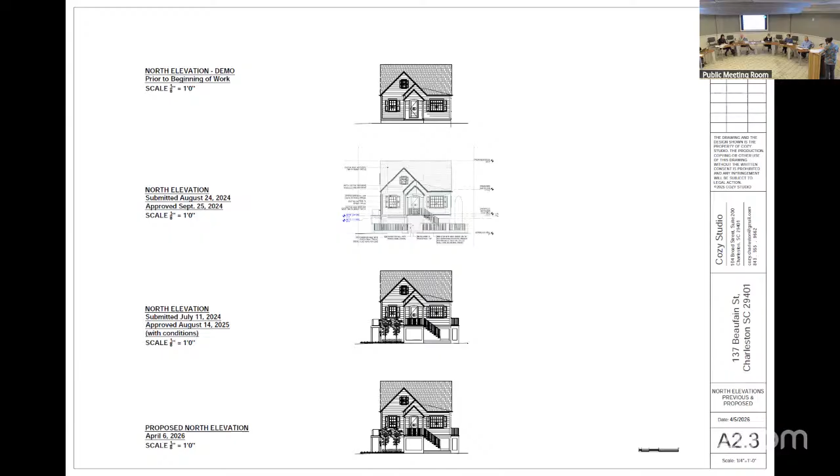And then the final slide. Just point out that the 2024 submission here, the garage, outswing garage doors that were under the primary home. In 2025 submission, we moved the garage doors to the underside of the 1984 addition.

We're proposing to keep the underside of the porch open at this elevation here. And then we would still have the full height screen porch, low slope roofs, exposed rafter tails, stucco chimney piece. We are proposing 2 new windows in the 1984 addition here. They would be the same in kind with the windows on the east and west elevation of that addition as well.

Final notes would just be, we intended to retain a design similar to what was previously approved, and the changes to the roof and rafters, we think, improve the overall design.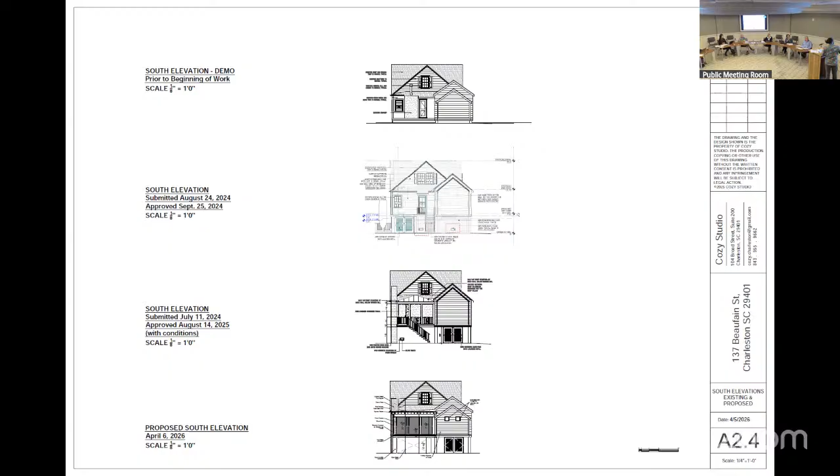On the part you referred to as the 2024 edition, why are the roof lines different? At the top and bottom they're separated more, but in the middle two they're different. That is a remnant of existing drawings and an error. We were trying to track down and actually measure where that roof is. We're not adjusting anything to that. The actual roof eave and pitch, we believe, is here.

As you see in this image, there's a good bit of space there. We didn't think the other ones are incorrect, staying with the other drawings.

Could you go to the plans? I think it was C1. Yeah, so.

It looks like we're taking off the stair, but then there's kind of a footprint change between this one and this one. If you see, there's this bay piece and then this is flush, whereas here you have kind of the bay piece and the porch bumps out. And there aren't any dimensions on the new ones, so it's hard to understand. And then this starts to look really awkward in the elevation.

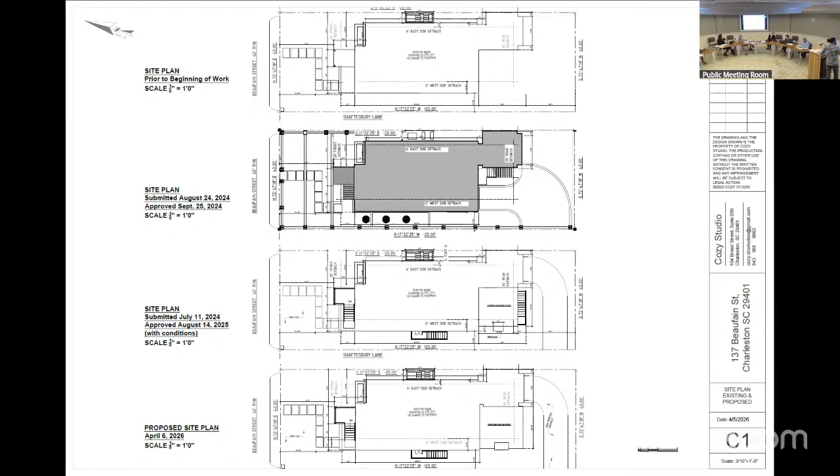That's actually why I'm asking about it. Got you. So I didn't know if the porch grew, I guess, just wondering what's happening since that wasn't called out as a change, but those two different drawings are different. And then if you go to the elevation, it looks awkward, it's hard to end that porch roof because there's a weird little base there.

And honestly, this is why we have seen this project so many times. So the fact that there are all these presentations is actually the problem, the drawings are different every time. I think that's the challenge for us. There's been quite a few hands on this, somebody presented it differently every time. So that's a testament to the inconsistency. But it's just hard to review that rear elevation.

We could definitely. It's the area Ms. Altman was asking about with that roof lower, now the porch roof is wrapping around with the open wrap. It's all kind of awkward back there.

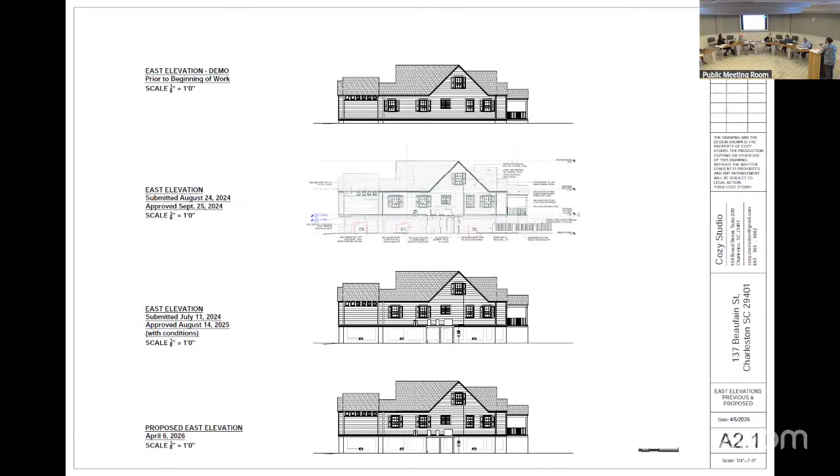I think the extension of the space was to create symmetry with the chimney, and similarly to the proportion on this elevation of the house. So that's why this bump out increased a little bit. Maybe the chimney needs to move to keep everything symmetrical. Put it back in. Left hand page. No.

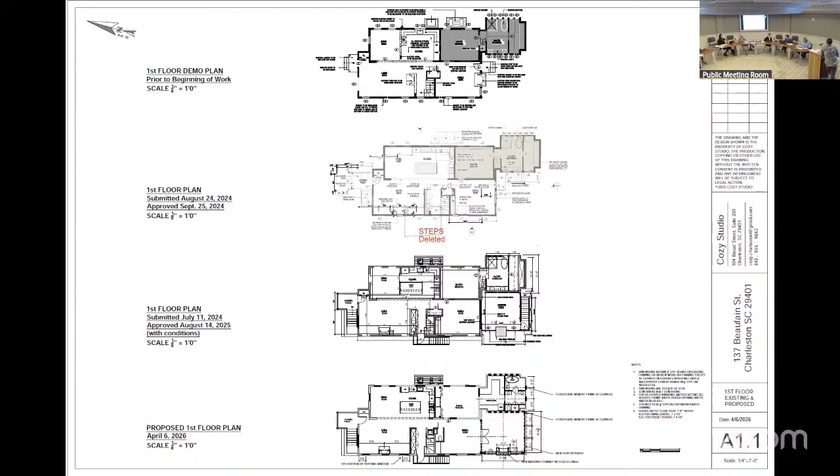It's not built yet, right? No. Because if you look at your roof plan, if you could keep that new low slope roof within, like if this roof could be pulled back to this, which is where the higher roof used to be, into where the wall is, then maybe it won't have such an awkward situation.

And we are in board questions. Oh, sorry, no, you're fine, just to let everybody know. Are there any other questions for the applicants?

Before we move back into board discussion, did you want to clarify or respond to anything in the staff comments? We did study that plan and elevation where the line of the roof falls. Okay. All right, public comment, the applicant's presentation is now closed. Now we'll move into board discussion in a bit. I think it's all been said.

It might, I think, just that plan change and roof change is problematic, but I think you'd want to see it back. I mean, I don't see it again. I think I've seen it already in the 4 years I've seen this project. I think it's a detail thing. So do you think they could go work with staff?

I mean, I think in general, the lower slope roof and the chimney looks better than it looked before. And I haven't seen this other than driving by it.

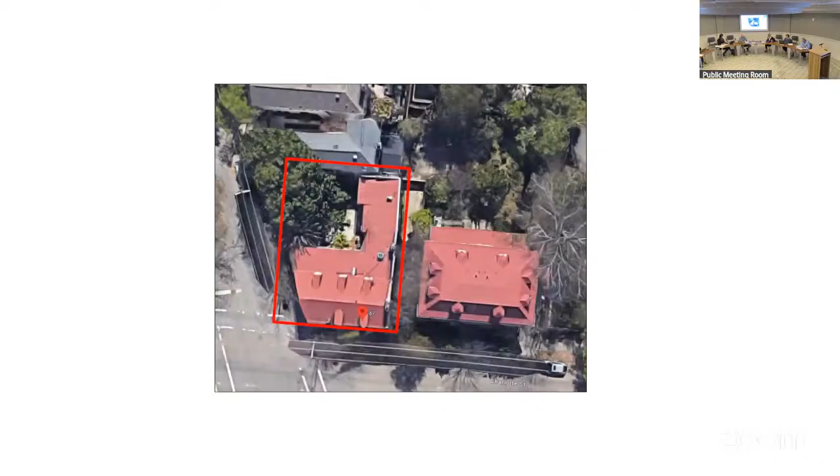Okay, agenda item 12, 47 Charlotte Street. Frankie, if you could give us an introduction and overview of the project, please. 47 Charlotte Street is in the Garden District, Council District 4. It's not surveyed, circa 1841, in the old historic district. They're requesting conceptual approval for a fenestration change. Here's the property's location on Charlotte Street, and I'll turn it over to the applicant.

How are y'all? Henry was going to do this, but since it's my house, I'll handle it. So we own this property with Jess and Alice Way. This could be a little bit arduous with me doing this.

Is this what moves it? Yeah. The elevation is what it looks like there. So this is the house on the corner of Elizabeth and Charlotte. It's an old grocery store, 1840, brick. It's really a good building, it's a good house.

We started doing masonry repairs on the inside. It was so long and took so much time and money that we hadn't done the outside yet. So we've gone all the way back, pulled all the cement mortar out, and she's strong now. So what we're asking to do, we met with Frankie and told her what was going on and asked her what she thought. Two things she wanted us to review with y'all were...

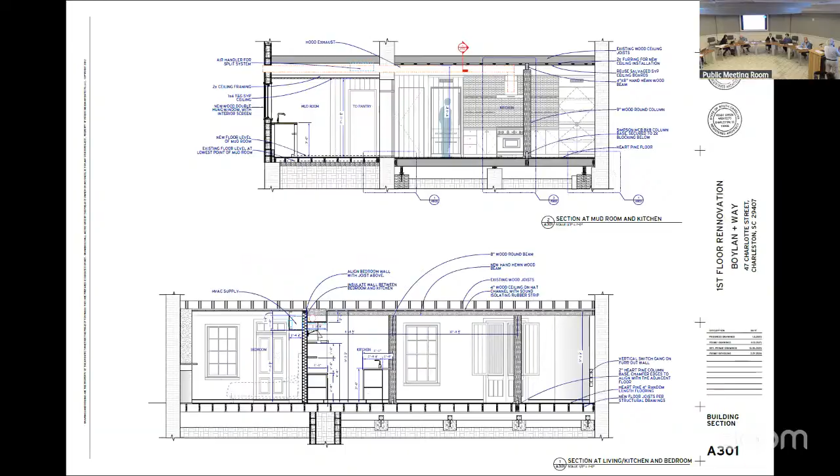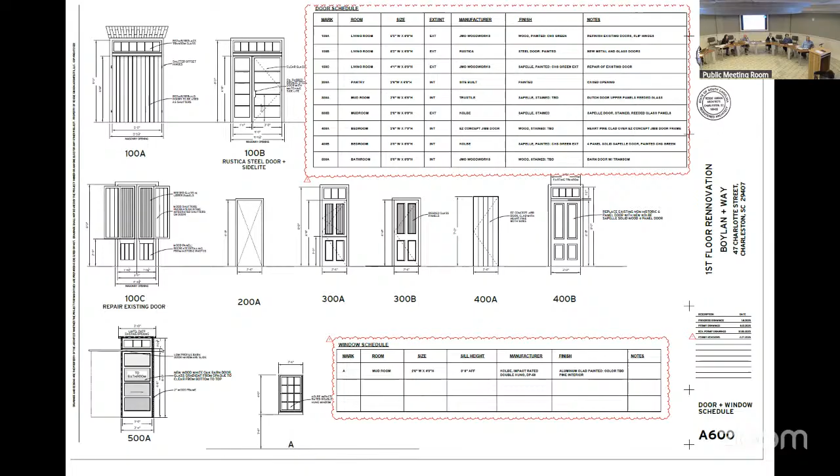Can you go to the door schedule? I think it's A600. Here, yeah, so sorry, this is the door. So they cut it off like right here, and they cut it off and just jammed it in there, so it's like 6'2". So what we want to do is take the existing transom out, which we had to think long and hard about because it's kind of cool with the transom, and they put this bent metal right here, but it's 18 inches deep.

Repair the existing door and reuse all the historic material out of it. And that was one of the things Frankie said - I don't think we can put that without asking y'all, which I understood.

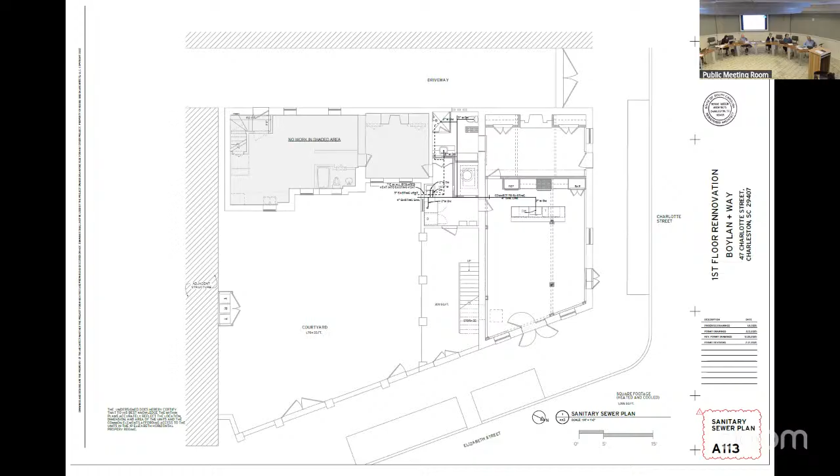And they wanted to link this upper area. They enclosed the plan - enclosed the porches on both floors, from here back. So you can see the open piazzas, and they did it on both floors. Upstairs, all the French doors still exist to go out to these funny little rooms, but this is where it was enclosed.

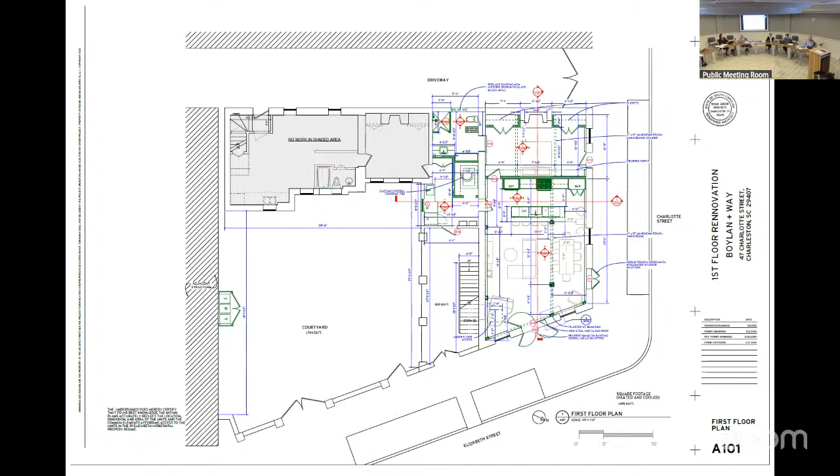So in manipulating their plan, we really didn't want a door in the bathroom of this 1970s addition. So we said, what could we do to get some light in the bathroom? He said, well, there's a gate here on the adjoining property, and this is about 28, 29 feet back from the gate. I should have got a photograph of this, but there's a big jasmine.

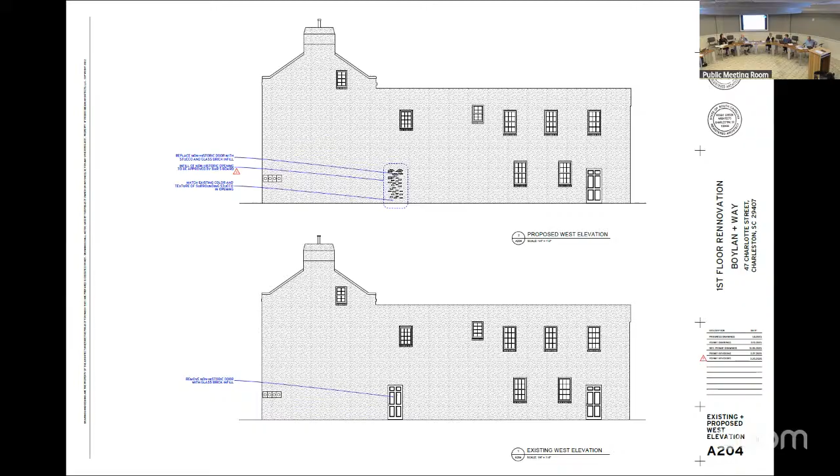We have one, so you can show them what that looks like. What we just thought would be nice was to add glass brick into that opening. Here's the gate, here's this door, which again was sort of the 1970s, 80s door. We wanted to just infill that with stucco and add glass brick in a random pattern that is pleasing to the eye.

I don't have any classical proportions for glass brick - I'm really thinking on the 70s infill and stuff. I think it looks pretty nice the way we've drawn it, and as far as I know, that's what we're asking for. Am I good to go with that assumption?

So what about the door on the east elevation that's changing a transom on the short end? It looks similar to that one, so maybe it's the same kind of concept. This is what we're doing on this door - we're keeping these original shutter doors. I'm really not sure when this was done, but I think it was done after the store stopped being used as a store and became an apartment, and it's just a solid wall now.

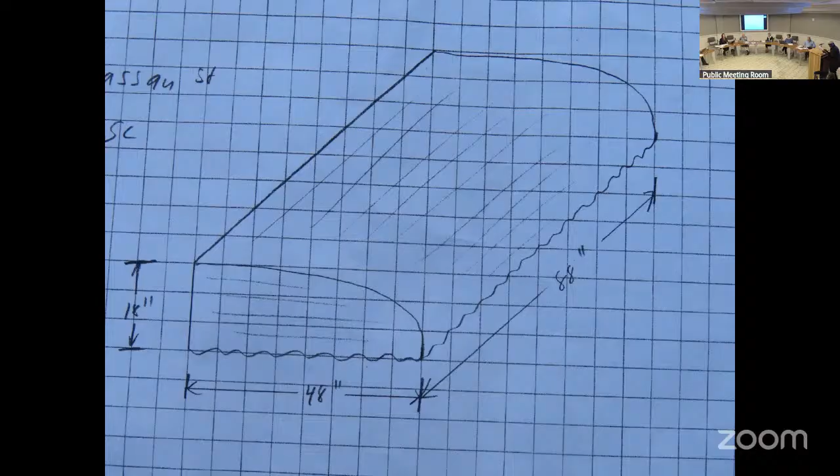Any other questions for the applicant? Thank you. Do we have anyone speaking? Frankie, we just said that the proposal couldn't be approved by staff. Staff generally approves the removal of these, not the addition of them. Okay, thank you. It did have that awning and it's documented in the '84 inventory card. Yeah, that's what I was looking at.

Did you want to respond to or clarify anything that Frankie just said? You don't have to. I don't know, I would like to keep it like it is.

All right, public comment and the applicant presentation is now closed. We will take discussion and a vote.

I think we had one of these recently with vinyl siding, do you remember this? It was the only time we've ever approved vinyl siding because this was what was existing, so it was really a replacing kind of situation. I'm thinking this might be in the same vein — we normally approve removal of these, but if they're just putting back something that was historically there... Well, it wasn't historically there because of the age of the building, it wouldn't have had this type. That was the vinyl siding. I don't remember — I must not have been in that meeting. You were, I was. We really struggled with it.

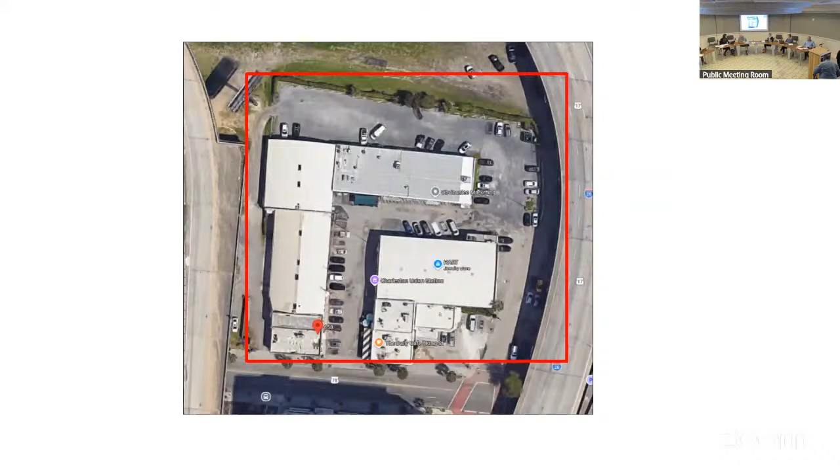Okay, 658 King Street is in Central Council District 4, it is not surveyed, circa 1945, in the old historic district. They're requesting final approval for hand-painted signage. This is the building's location on King Street. I'll turn it over to the applicant.

Thank you. So hopefully this one will be just as easy. We are proposing to hand paint some signage that fits within all the guidelines of what would be approved if it was a traditional sign. The only difference is that it's hand painted, and after the changes, anything hand painted has to come here as opposed to being approved by staff.

Frankie, did you work with Lindsay on this one? I think so. No, my partner usually handles most of the permitting and stuff. Yeah, I believe we talked about this — the building, or their space, is actually quite large and extends down into the mural area. The total sign dimensions are 2,325 square feet, of which we're only trying to use a small portion.

So we should be well within all the guidelines. It's just the fact that it's actually painted on the building as opposed to having a fabricated metal or plastic letter stuck on the side, which we felt fit within the architecture of the area. Is it qualified as a mural? It's actually covered in the sign policy — the staff review policy. Hand painted signage and murals have to be approved by the board. I'd encourage you not to do that, but anyways, any questions?